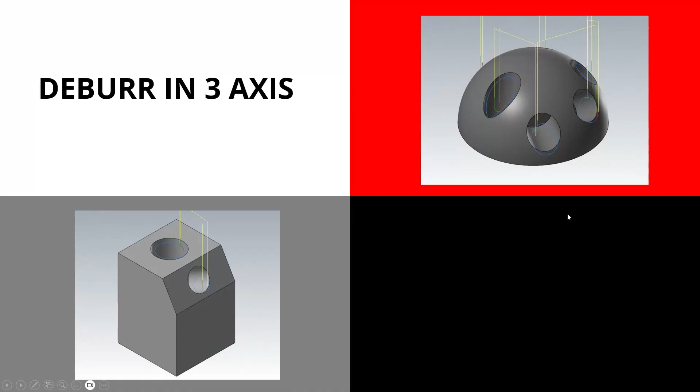Deburr in 3-axis. So the Deburr toolpath is always thought to be just multi-axis, but we can use it in 3-axis as well. So maybe we had multiple setups. We don't have a multi-axis machine, so we have to do it on 3-axis.

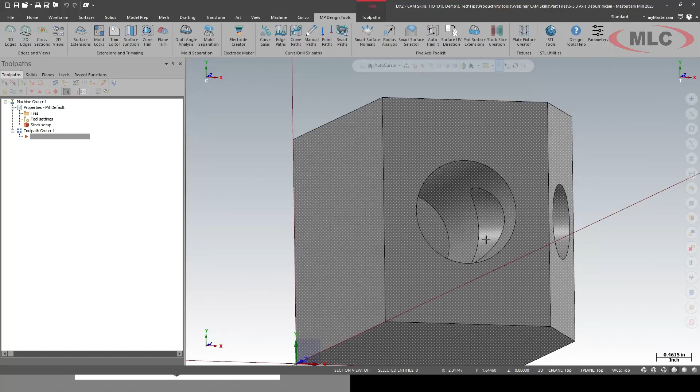I have a setup and I drill this cross hole and I come drill this cross hole, but I want to break the edge of that intersect.

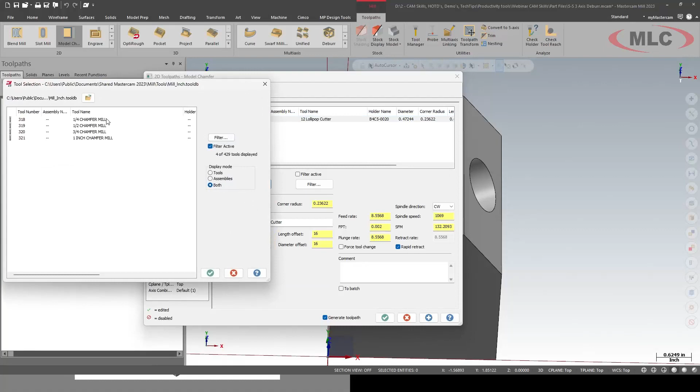Now, traditional easy would be, I'm going to break the edge on top, just do my good old model chamfer, select my edge, select a tool, and we'll say we're doing 10th thou, and I like top clearance, top offset better.

Awesome, broke that edge. Now what about the cross hole? So if we go into our multi-axis Deburr, I'm going to use my lollipop tool, set my cut pattern, select the whole part, and I'm going to tell it exactly what edge I want to cut.

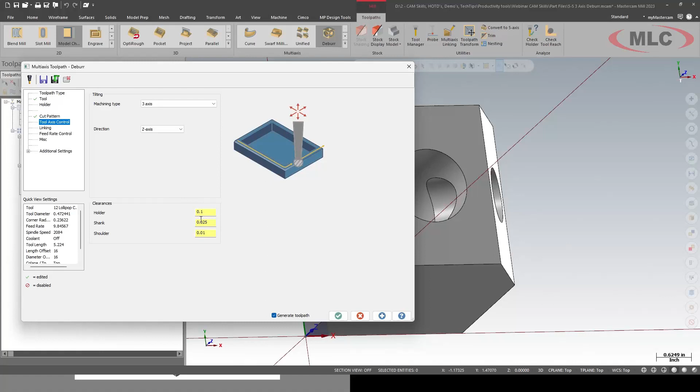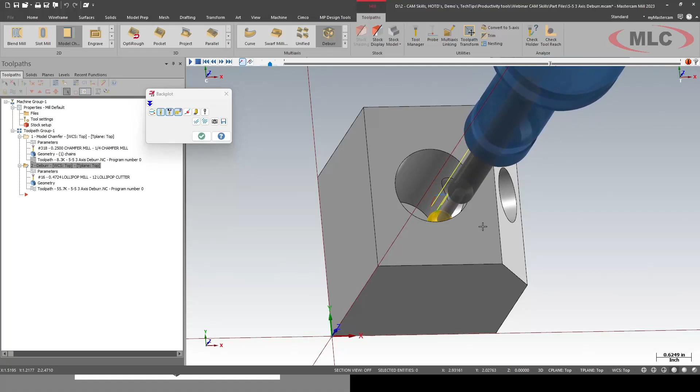Able to get in close, break the edges of that cross hole. Saves me time. I don't know if everybody has a deburr department, or if it was just you setting up the machine deburring parts. I'm going to let the machine do it.

So hopefully just a quick idea on other uses. I guess we got one more sample we could take a look at.

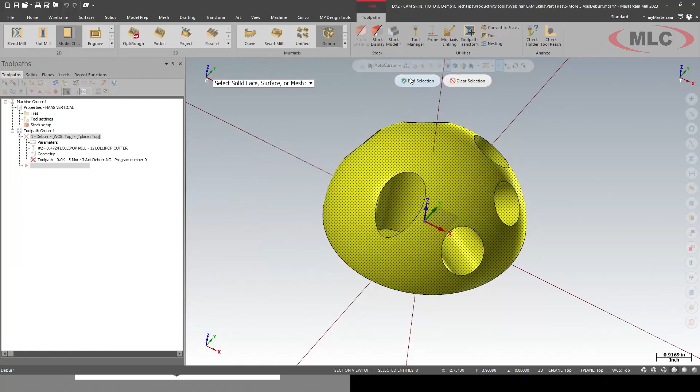Honestly, we're going to use the lollipop tool, cut pattern, and I always like to tell it exactly where I'm going.

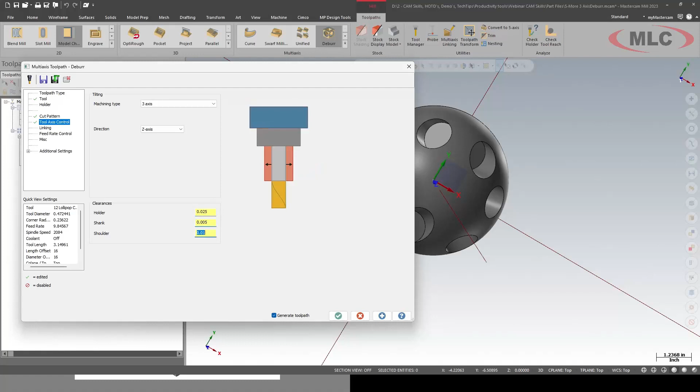So break the edges. Again, I'm going to reduce this down a little bit just to make sure I can get all the way in there. And test the pucker factor of your operator.

So maybe we started off on a 3-axis machine, but we can always come back and change this to 5-axis. Let that generate and be able to break all the edges.

So we can break it on a 3-axis machine, we can break it on a multi-axis machine. So it's a very versatile tool.

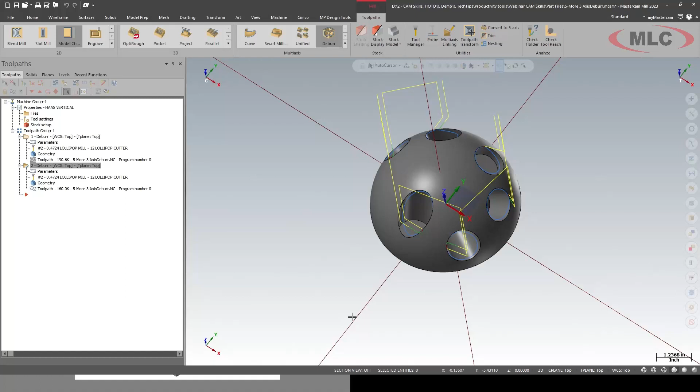So just super easy to use. It's going to save you time in the long run, less handling, so you're not having to do as much work, less chance of error to gouge a part with your file or something like that.